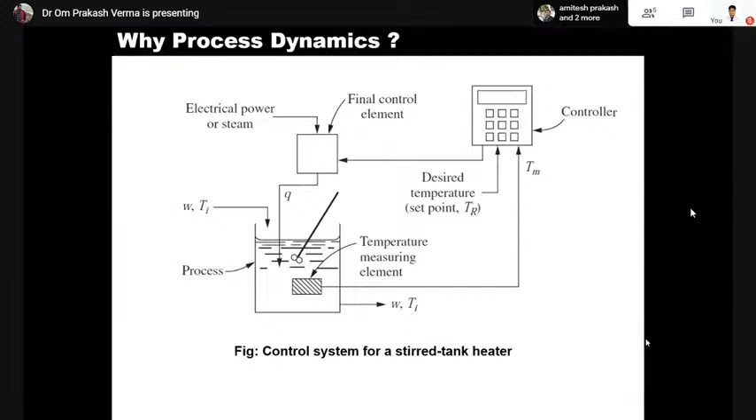Okay. So yesterday, what we have discussed. First, about different types of mathematical model development of some process, such as liquid level system, temperature control system. So we have developed the model with the help of first principles of thermodynamics using the mass conservation, the heat transfer, energy balance, and the component balance. Based on that, we have understood the difference between the open loop system and the feedback system. And then we have discussed the feed forward control system and feedback system.

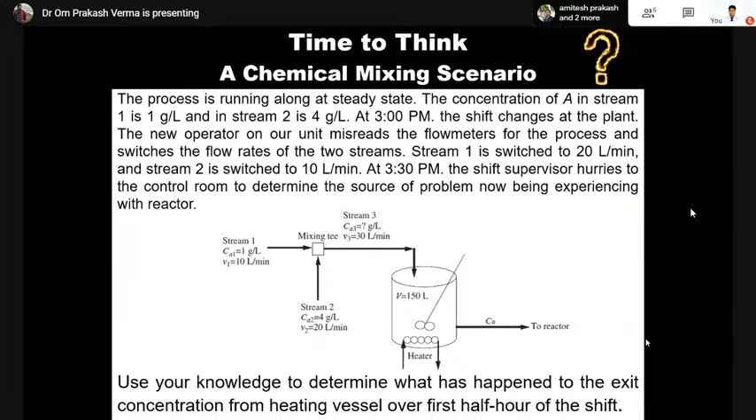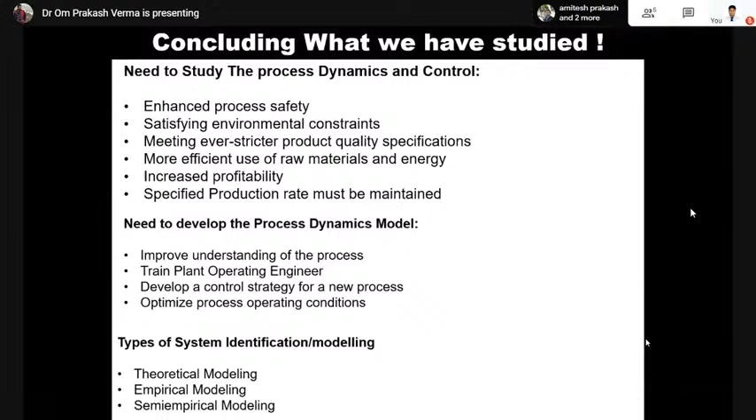Then we have discussed some questions why the process industries are important. And in order to that, we have discussed the problems regarding the operation control for the process industries, in which we have discussed heat transfer and mass transfer like problems, and then we have seen the transients, and we have discussed the different types of process model. Then we have discussed the model part, and the different types of the modeling equation.

Which type of equations usually occur or are usually developed in the mathematics for the system model. The system model consists of generally algebraic model, ODE, PDE, and maybe the combination of ODE, maybe the combination of PDE, and maybe the combination of all three. Then we have discussed the model in terms of linearity and non-linearity. Then we have discussed static and dynamic systems.

In the dynamic system, we have discussed the accumulation term. We have discussed the d by dt term; in the steady state it becomes zero. Then we have discussed the lumped parameter, distributed parameter, and we have solved one example using the distributed parameters of the solid, the heat conduction in the solid. And then we have discussed the different types of model using the white box, gray box, and black box. We have seen the regulator and servo problem also.

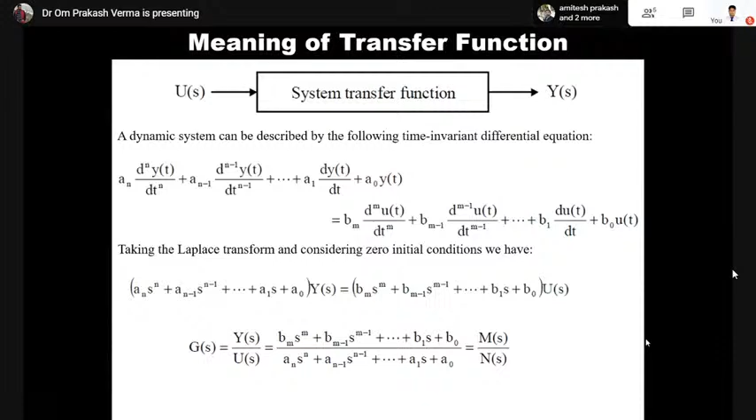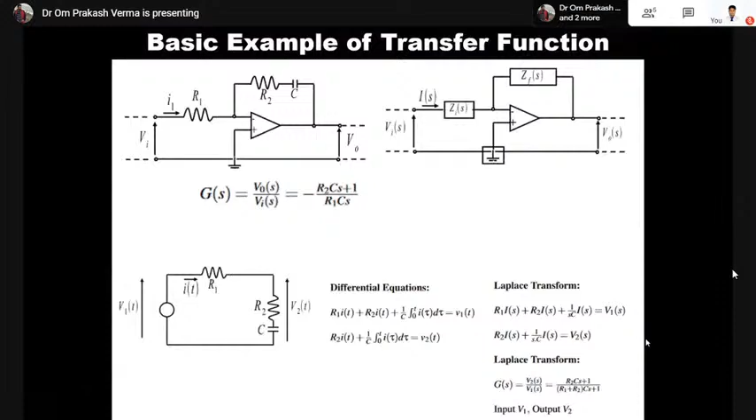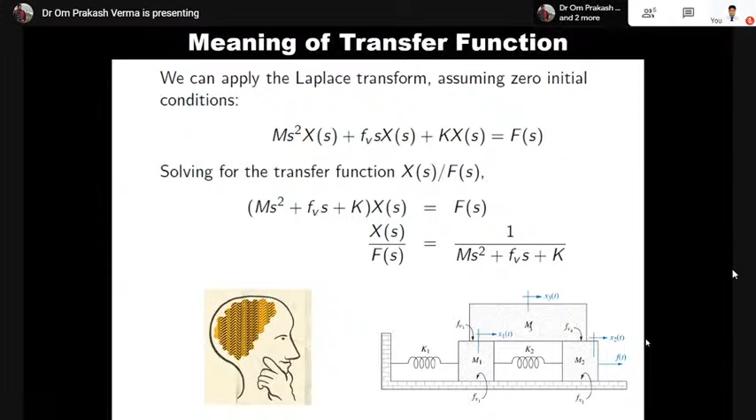Then we have discussed yesterday the transfer function, the concept of transfer function. What is the real meaning of transfer function? And then we have developed some equations of an electrical system, then the mechanical system, and then I have given one assignment, but due to the unavailability of the PPT, it has not been solved. But try to solve it today. I will give this PPT to all of you, so try to solve this puzzle.

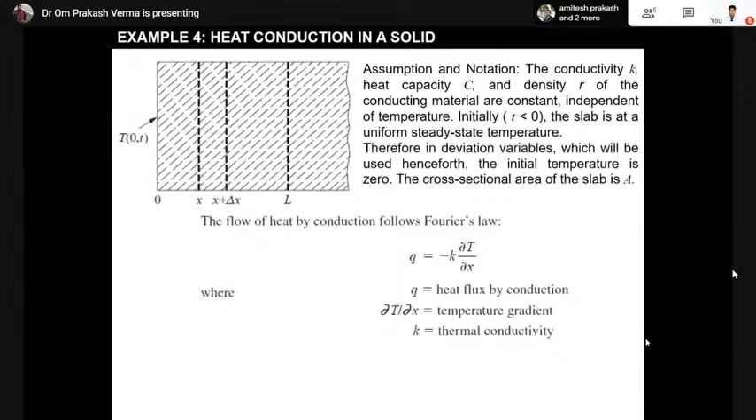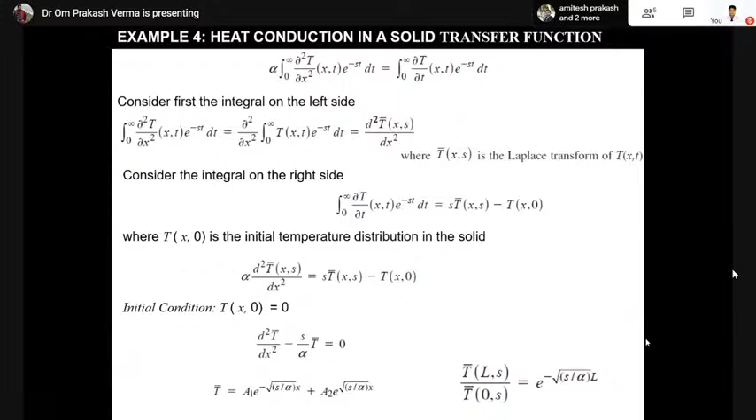Then we have discussed the first order transfer function of the liquid level tank, then linearization techniques. We will discuss these things more after some time. Then we have discussed the distributed parameter model, that is the heat conduction of solid, and then we have concluded with the state space equation, how the state space equation has been written for your mass spring system. So I am starting again with this PPT.

So in the state space equation, what we have learned in the spring mass damper system, which is basically a mechanical system. In the mechanical system, when we write the equation, the force acting on the mass is ma, that is m into d2x by dt square, and the force acting on the spring is kx, and the damper force is bv, damping coefficient into the velocity, and that velocity is written in the form of dx by dt.

Generally, in the book, B is written. We have used the symbol f subscript v. There is no problem, both are the same. And k is Hooke's constant, that is the spring constant, k into x.

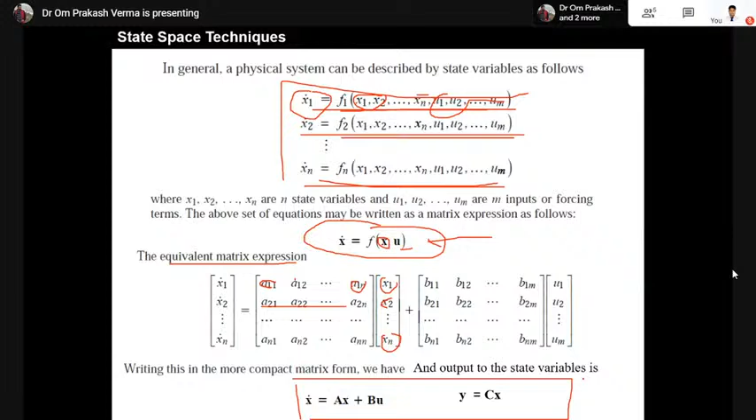So finally, the compact equation we can write like this: x dot equals Ax plus Bu, y equals Cx. Now I will give one example of the process industry problems so that you can understand how the state space equation is developed. This is one very classical example used in the process industries: the interconnection of two tanks, but there is a beauty in this connection. See the first connection and the other connection.

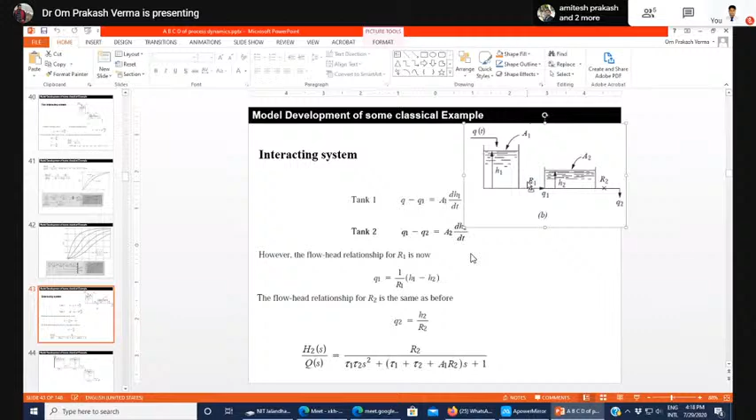So do you find any difference between the two tank systems? Wait for a minute, so that you can understand it easily. Okay, so now see, is there any difference between this one and this one? Obviously, yes. The interconnection of these two tanks and these two tanks is entirely different, and therefore the characteristics and the response of the system become entirely different.

This connection is known as the non-interacting type connection, whereas this type of connection is known as an interacting system. Why is it called non-interacting? Because the product of the first tank, when entering the second tank, is not connected directly, but goes through the air. However, this one goes through the pipe, and they are interconnected to each other.

So the resistance R1 and the relation of R1 with this one are entirely different. It will take a different equation, and therefore there is a difference in response. So we are trying to develop the model of this non-interacting system first. You have already seen the development of the first order single tank problem.

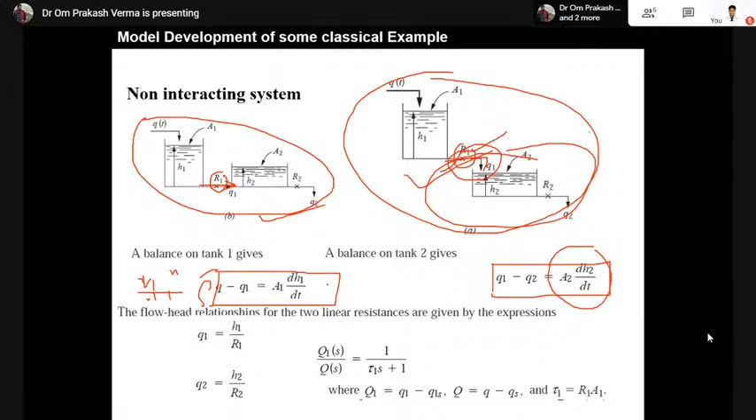So this one and this one are totally independent equations. And as we know, if the valve R1 shows a linear characteristic, then the equation is written as q1 equals h1 by R1. Similarly, you can write q2 equals h2 by R2, and this equation is only valid for a linear system, okay. So just put this value of q1 here and q2 here, and solve the two equations.

After solving the equations, you already know what happened for the first system. What is q1(s)? q1(s) is the output flow rate, and the input is q. So the transfer function, I am repeating once again, is the relationship between output upon input in Laplace transform, putting all the initial conditions zero. We have already discussed why the initial condition is zero and why we have taken the Laplace transform, due to the need of the system.

We can take the Z transform. We basically have to establish the relationship between output upon input, so therefore we have taken it. So now, q1(s) upon q(s) becomes 1 upon tau1 s plus 1. There's no problem, and we have already solved h1(s) upon q(s) equals R1 upon tau1 s plus 1, in the previous slide.

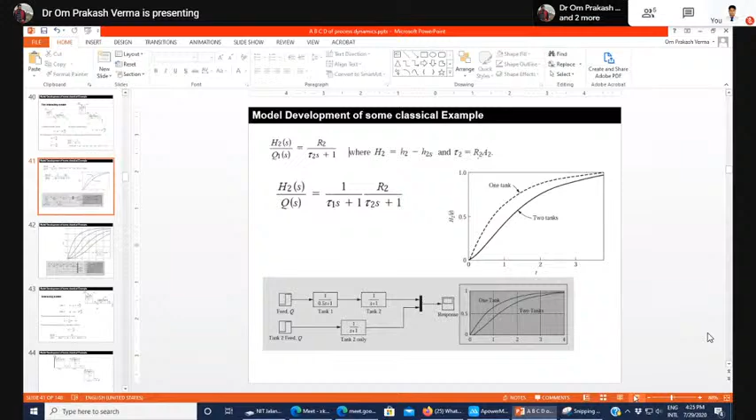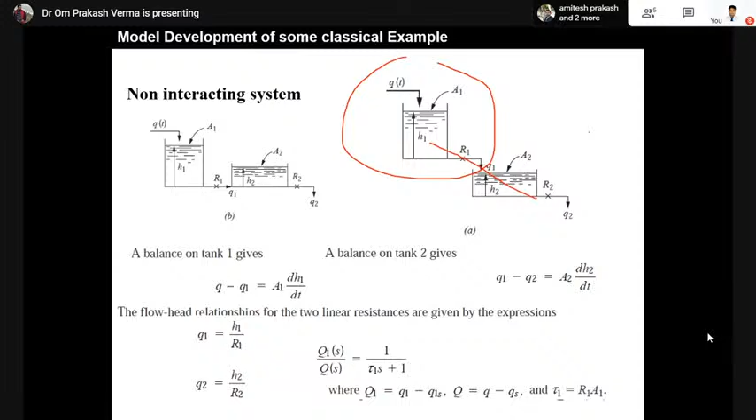Now it's time for some simulation. Now I want to discuss the response of the two tank system. This is basically a single tank system, and when it comprises two tanks, it becomes a double tank system. When we compare the response of the one tank and two tank systems, obviously the single tank system is faster than the two tank system.

So how can we find the response? In MATLAB, you can write your code, or otherwise you can make a Simulink model. With the help of a Simulink model, you can find the response of the system. Suppose this is q. This is the step response. We will discuss what the meaning of step is. So just, we are applying a staircase input.

Okay, the staircase input with, let's say, unit magnitude one. And this is in MATLAB, just to put the values of the transfer function. Let's say tau one, the first time constant of the tank, is 0.5, and the second is, let's say, 1. When you simulate the system, obviously this is the open loop system. We have not used any controller.

Similarly, this is the single tank system, the first tank. This is when we take the single tank system and compare the response of the system here on the screen. So the output will come here. You can see this is the one tank system response, and this is obviously the two tank system response.

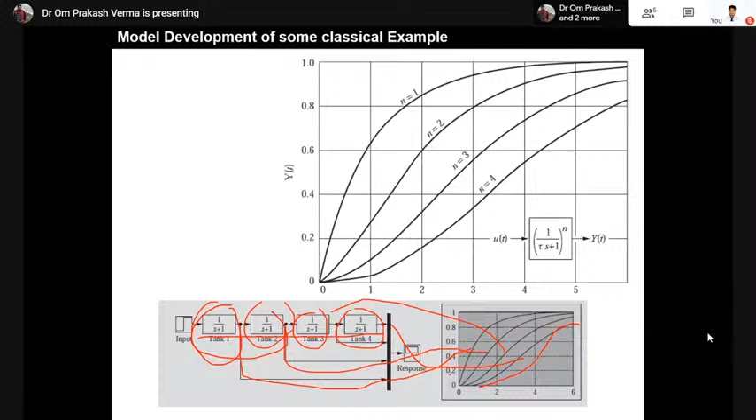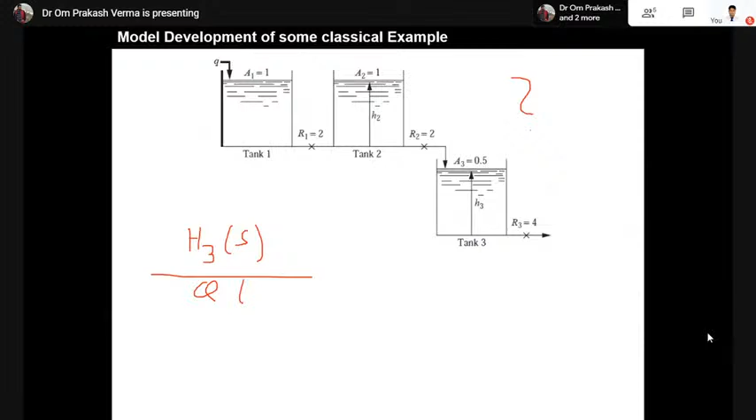So you have to solve this question, you have to develop this model and try to find out the transfer function, H3(s) upon Q(s). Try to solve this transfer function. So this is one of your assignment problems. Try to solve. If you practice such types of problems, then you can solve any type of model usually used in the process industries.

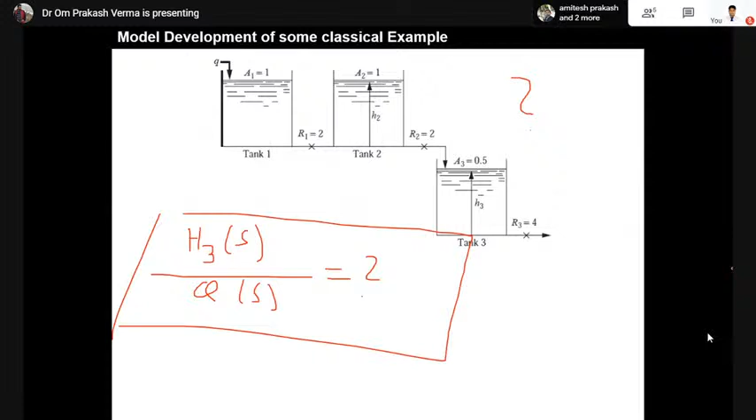Right. So now see, I want to develop the same model using the state space technique. So what is the benefit of the state space technique when we convert the same model into state space? Here we have written the model in the Laplace transform. We have established the transfer function in the form of Laplace transform, and the same equation may be written in the form of state space. So what is the need for the state space equation?

We have already discussed that the state space equation is applicable for the non-linear system also. However, the transfer function is not available for the non-linear system. Also, the transfer function is simply not applicable to the MIMO system, that is multi-input and multi-output; it is only restricted to single input, single output. However, state space is applicable for the multi-input and multi-output variable system.

One of the greatest advantages of using the state space technique is we have written the equation in the form of matrices, and MATLAB or whatever computer simulation generally uses matrix multiplication, matrix addition, some type of matrix application. It is easy for the simulation. It is easy for computation using the computer. So therefore, we are representing our problems, our models, in the state space equation.

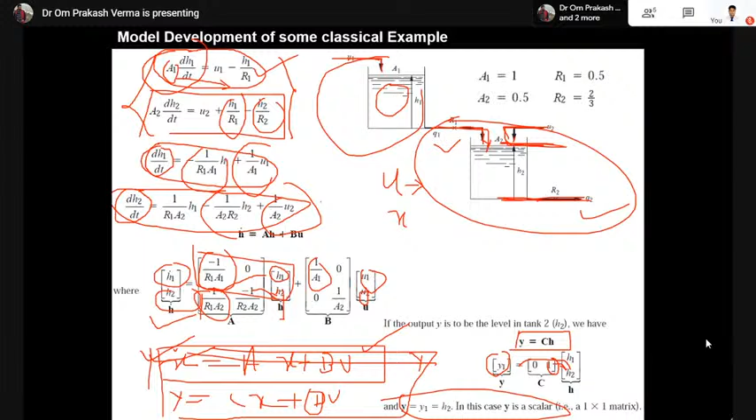ABCD of process dynamics. So basically what you have studied in class will be the basic of control system in third year. But once you have the knowledge of the basics of control system and enter into higher study of control system, you encounter only the state space equation. So from the state space equation, the real control system starts. So there's no problem.

So now we are entering into the world of transient analysis, basically time domain analysis. In time domain analysis, the response of a dynamic system to an input is expressed as a function of time. Basically, we want to find out the transient of the system.

After applying some input, such as here, you can see this system. Let's say this is the transfer function, this is the flow rate, and this one is basically the change in the level of the second tank system. So when we change the input in tank one, the level of tank two will change accordingly.

So for h2 to get some saturation, it will take some time. So during that time, how much it will take for saturation, for settling, we have to analyze. So for the analysis of that, we have to supply some input and check what happens with the output.

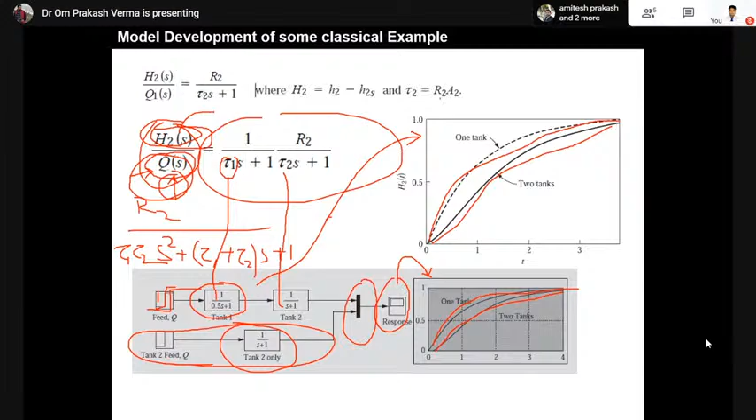So for that purpose we want to study the time domain analysis. It is possible to compute the time response of the system if we know the nature of the input - meaning what we are supplying as input - and second, the mathematical model of the system.

So I think we are now enough to understand how the mathematical model of the system is developed.

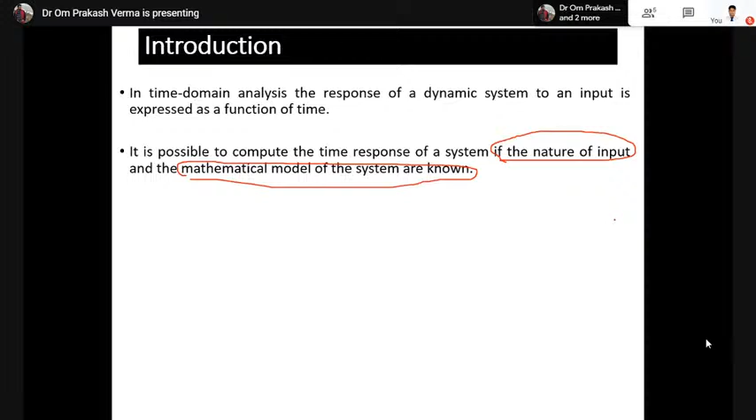How the mathematical model of systems are developed, we have already discussed. Usually the input signal to a control system is not known fully ahead of time. The problem is, in a real time system, the inputs we are going to apply are not known. The nature of the input we are going to supply is not known, how it is going to change, we don't know. So we just apply some classical testing signal so that we can test the output response to the input.

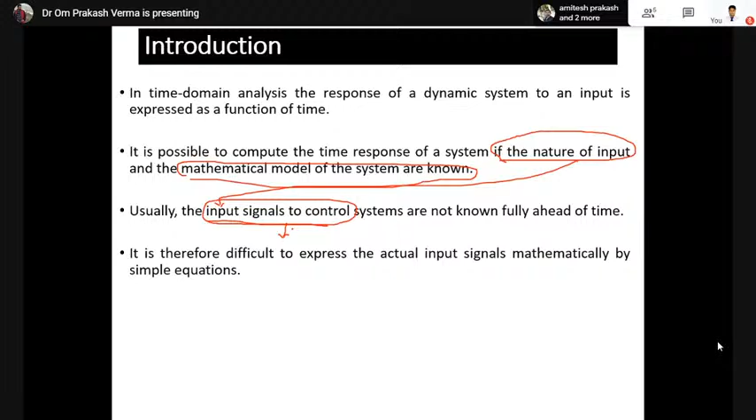It is very difficult to express the actual input signal mathematically by simple equations. However, we have developed some relationship for that input, based on the characteristic of how actual input signals suddenly change. We analyze the different nature of the input and try to mimic or develop such input in mathematical terms. Once we have the developed mathematical model and find the input, we apply it into the transfer function or model and visualize the open loop response, as we already saw with the coupled tank system, interacting or non-interacting types.

The general nature of the input is like a sudden shock. Sudden shock means, let's say at t equal to 0, in a very short time, the magnitude or value of the input is very, very high. At t equal to 0, it is like a shock.

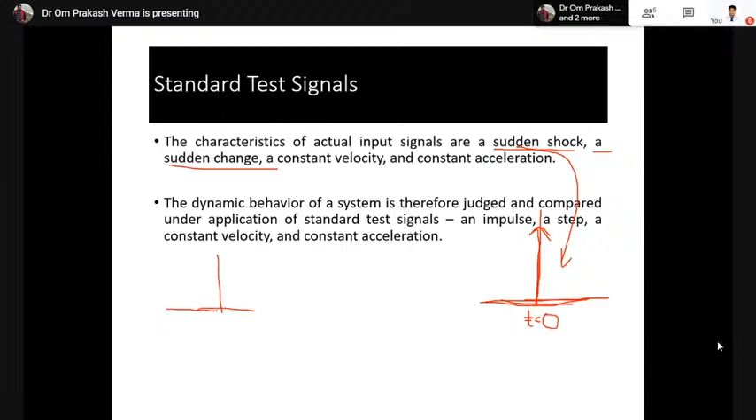Second, a sudden change can be represented like this: the input before t equal to 0 was, let's say, 0, and at t equal to 0 it suddenly changed to 1. This type of input is used in testing control systems. Second, the constant velocity, that is ramp type input, is used - this is the ramp system. Then the constant acceleration, that is parabolic type input, is used. So the important inputs are sudden shock and sudden change. However, these others are important but less so - our focus is mainly on sudden shock and sudden change.

The dynamic behavior of a system is judged and compared under the application of these test input signals. This input signal is known as impulse - this is the impulse signal, this is the step signal, this is the ramp signal, and this is the parabolic signal. Impulse means a very high value in a very small time, and this is the step input.

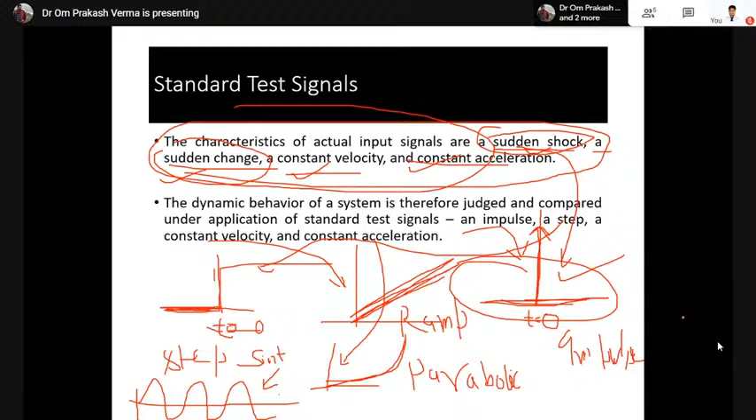Now the other standard signal of great importance is sinusoidal. Sinusoidal signal is also one of the inputs we apply, but I have not included it in this PPT - it is sin(t). I will try to give one example using the sinusoidal input so you can visualize the problems easily, and why we use such sinusoidal input.

Now let's come to the mathematics of this test. These are very basic signals you have already studied in signal systems, but if you don't know this, it is my duty to introduce them. This one is the impulse signal - at t equal to 0, the value is very high. Mathematically, if you studied signal systems, this is represented by minus a by 2, this is a by 2 - the concept is like this, and the magnitude is...

Okay, so this is minus a by 2. And this one is a by 2. And then 1 by the magnitude of this one is a, 1 by a. Now what is the concept here? The concept is, listen very carefully, it is very important for your engineering problems, because you are electrical engineers, so you should know this one. What is this? Okay, so as you decrease this...

What we have to do, basically, the area of this region, the area of this pulse signal is fixed. That is the one. So we have to fix this one and change the width. So ultimately, if we want to keep the area one, and let's say this is approaching this side and this approaching this side, then we have to increase this value. Agree? So we have to increase this value in order to make the area one, as we have reduced this width.

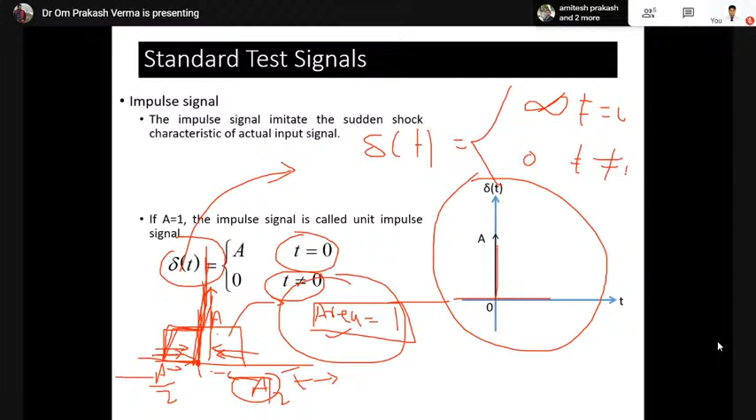Okay, so this one is basically the concept of the impulse signal. So delta t is basically defined at t equal to 0, and at t not equal to 0, the value is 0. However, this is also defined like this one: delta t is nothing but the value is infinite at t equal to 0. However, the value is 0 at t not equal to 0, right? So this is also one definition. This is the unit impulse, and if it is not defined, then it is impulse signal, right?

Okay, now the step signal. The step signal is what I have changed. This is the change in the input, as before zero the value was zero, and suddenly at t equal to zero, the output is changed to one. But such type of this is only mathematics, it can never be the ideal. This system can never be realized, because it is a non-causal system.

And the amplitude, when you read the signal system, you will get the phenomena, Gibbs phenomena, and using the Gibbs phenomena, if I ask a question - a very popular question - what is the value before zero, before t equal 0? The value is 0, no problem. Before t less than 0, the value is 0, no problem. And greater than 0, the value is also a, no problem. But what is the value at t equal to 0? Mathematically it is written as a, but exactly it is either 0 or a, you can't say anything. Okay, because this is discontinuous at t equal to 0. Okay, and since the function is discontinuous, you can't be able to find the value.

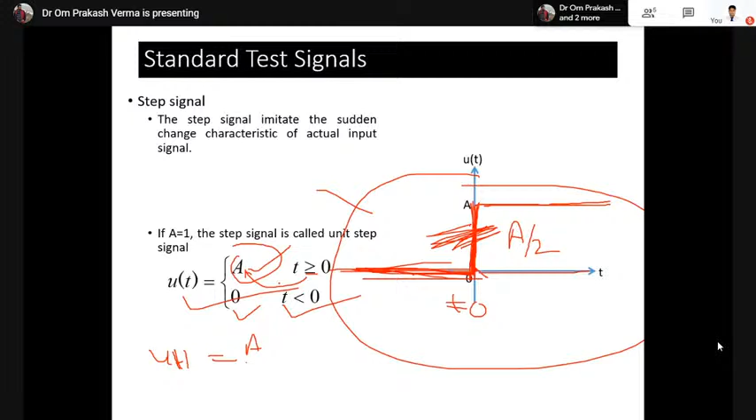So according to the Gibbs phenomena, we are taking the average value. So the actual value at t equal to 0 is a by 2, the average of this one and this one. Average value we are taking, but for the mathematical convenience, we have taken this value as a. So u(t) is equals to, a and 0. So this is the definition of the step input, right?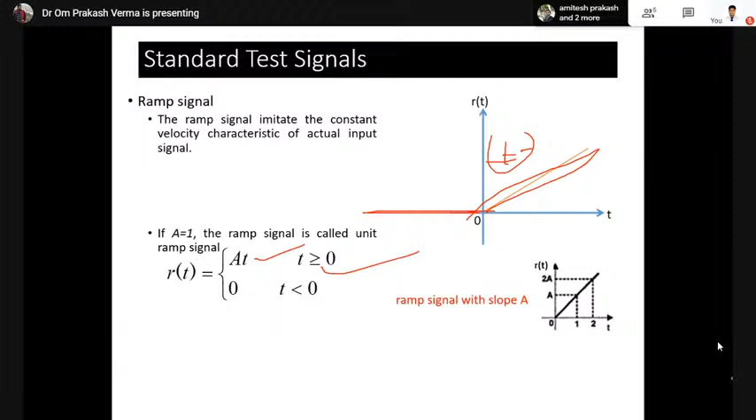So ramp signal. Okay, what is the ramp signal? Ramp signal is nothing but t with slope one. Slope is anything, 45-degree, whatever, and the equation is t, for t greater than 0, and the value is 0 for less than 0. Okay, so this is a ramp signal.

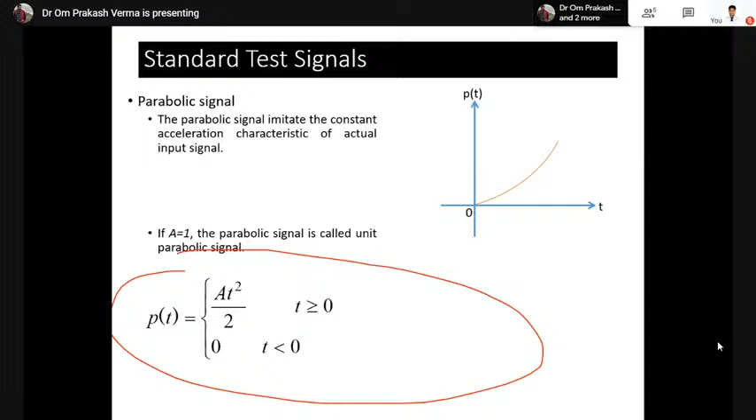Now come to the parabolic signal. The parabolic signal is nothing but At square by 2 for t greater than 0, and for less than 0, the value is 0.

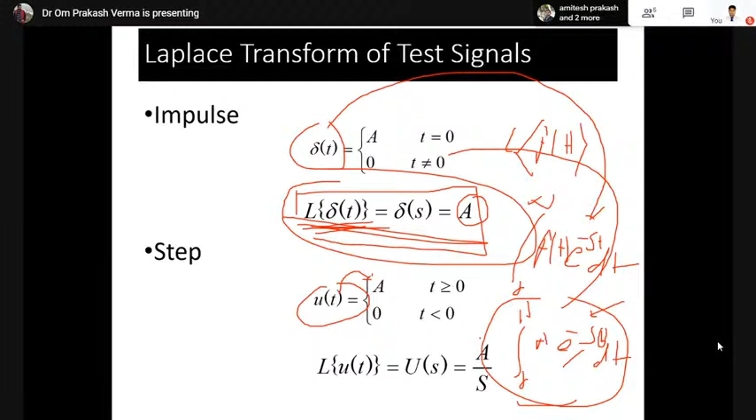So the Laplace transform of the impulse signal is nothing but the same value A. However, if you take the Laplace transform of u(t), that is A, then it comes to A by s. And what about the ramp signal? You can find out the ramp signal. There is no problem finding this, and the same for the parabolic function.

Okay, so now come to the response of the system. This is very important. So now, time response of a dynamic system. What is the meaning of dynamic system? A dynamic system is nothing but one that comprises differential equations, generally first order differential equations. In all the control systems we have seen already, the system is either a first order system or a second order system. Based on that, the response comes.

When you're supplying some input with variation of time, then you get some output with variation of time also. Now there are basically two types of analysis of the control system. First is the time domain analysis. Okay, time response, as we have written.

Second, the frequency response. When we apply some frequency input, then we get the response to that, the frequency response. Okay, we have not included the frequency response in the present course. However, for the analysis of tuning in the PID control, we will use the Ziegler-Nichols method.

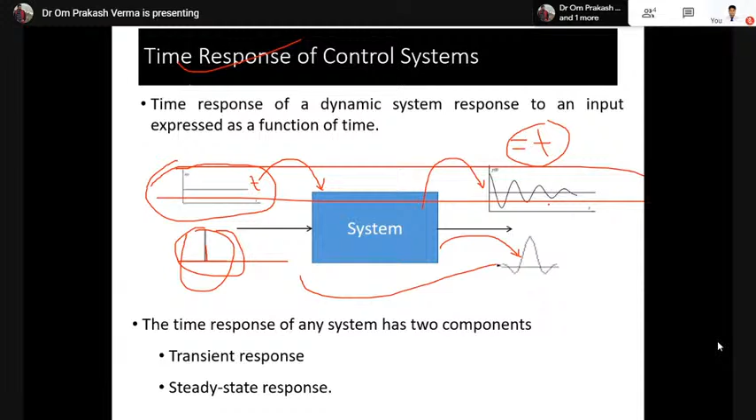Now the time response of the system has two components. Basically, first is the transient response. Second is the steady state response. We have already seen from the tank system and from the operating process problems, first the steady state problems and the transient problems also.

So when the input is applied to the system, at the same time the output will not change. It will take some time. And after that, it will take some time to settle the output or come to the steady state. So that time is basically your transient period.

That time is your transient period, and as control engineers, you don't want any transients. So the target is to reach the set point or the desired value as soon as possible, without wasting time. Our ultimate target is to remove this one.

So when the response of the system is changed from equilibrium, it will take some time to settle down, and this is called transient. As you know, this is the applied input and it will take some time to go there, and once it is achieved, it is settled. There's no problem. But we have to achieve this value as soon as possible. So this is our target.

The response of the system after the transient is called the steady state response. So this is the steady state response, and this is the transient response. This side is the steady state response. The transient response depends on the system poles only.

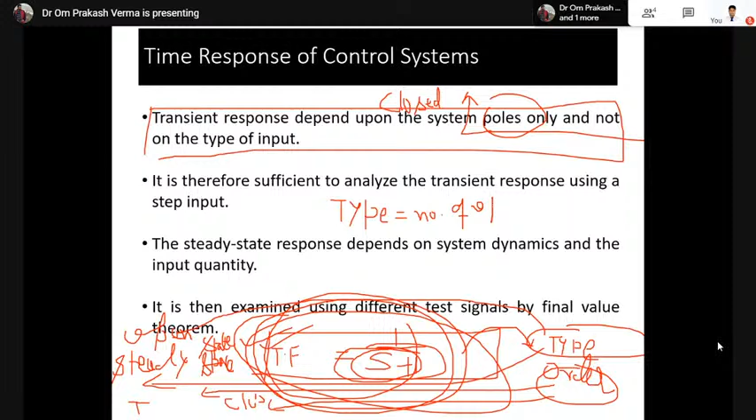It is defined as the number of open loop poles lying at the origin. So this is basically the definition of the type of the system. The type of the system is only defined for the open loop system, and it is the number of open loop poles

lying at the origin. So here we can see s to the power 0, and s plus 1 is written here. So s power 0 is there, so this is a type 0 system. This is type 0 and order 1. What is the order? Order is the maximum power of the polynomial, the maximum degree of this polynomial. The maximum power of s is 1, so your order is 1.

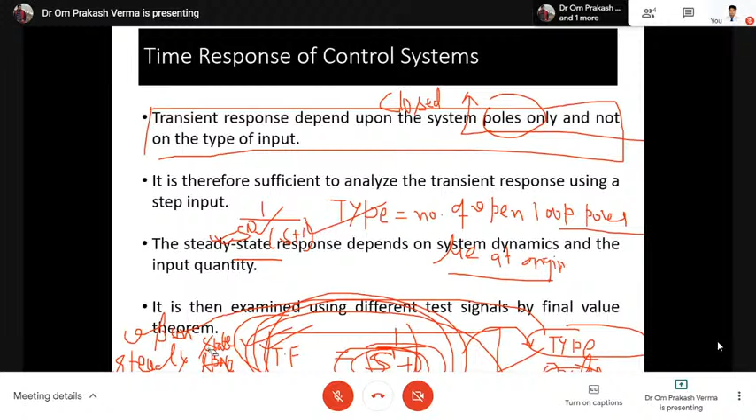So number of poles. Order of the system is the number of poles of the closed loop system. And I'm repeating once again, the type of the system is the number of open loop poles that lie at the origin. Is it okay? So for this particular problem, 1/(s+1), this is the problem.

It means the number of open loop poles is 0, but it is written here transfer function. Transfer function doesn't say whether it is open loop or closed loop, but generally the transfer function is used for the closed loop system. The transfer function for the closed loop system is defined as G(s) upon 1 plus G(s)H(s), the standard equation we have seen yesterday.

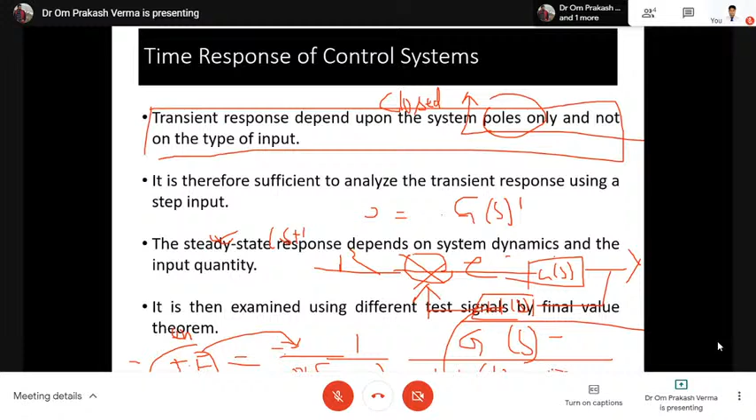So G(s) is your forward path gain, whereas this one is the feedback we have already discussed. This is the comparator, with the help of which error is generated, and this is the input and this is the output. So this is the transfer function G(s) upon 1 plus G(s)H(s). And what is the open loop transfer function? It is nothing but G(s) or G(s)H(s). If it is unity feedback, H is 1, so this is the transfer function for the open loop system.

So now G(s) upon 1 plus G(s) equals 1 upon s plus 1 is given. Basically, this is the closed loop system. When nothing is written in the problem, we generally consider the problem to be of the closed loop system. So the closed loop transfer function is given here as 1 upon s plus 1.

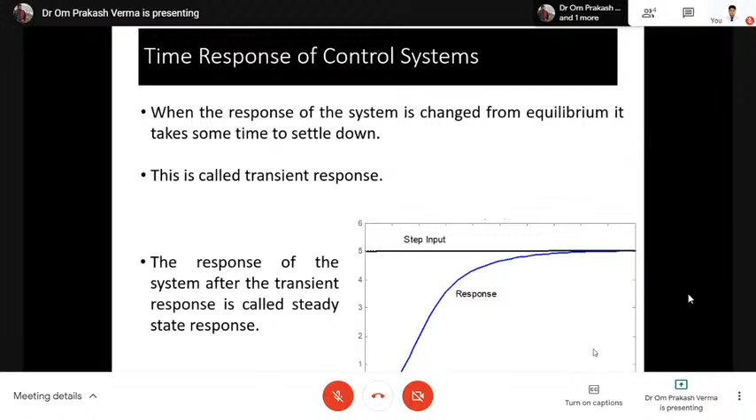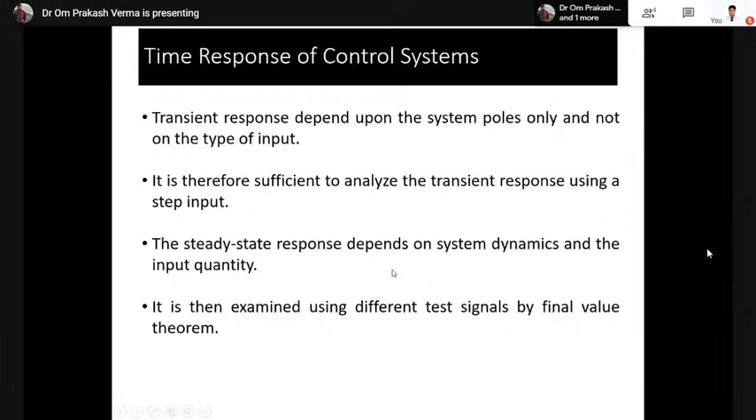So the transient response depends upon the system poles only and not on the type of input. Okay. It is therefore sufficient to analyze the transient response using step input. The steady state response depends on the system dynamics and the input quantity, which I will discuss. It is then examined.

Now see, this is a first order system, and there is one pole. What is the location of the pole? S is equal to minus 1 upon T. Okay, so the gain of the system is K. However, the time constant of the system is capital T. Okay, so this is the first order system.

Now we will start with the input. We are taking the step response. Generally, we are taking two types of input: delta t, that's the impulse response, and u(t), that is the step response, as we have discussed a few minutes back.

Okay, so what is the DC gain of the system? The DC gain question has been asked in the GATE exam in 2007, 8, 9, 10. I don't know the exact year, but the question has been asked. The transfer function was given, and they asked the DC gain of the system. So the DC gain of the system is the ratio between the steady state value and the input signal.

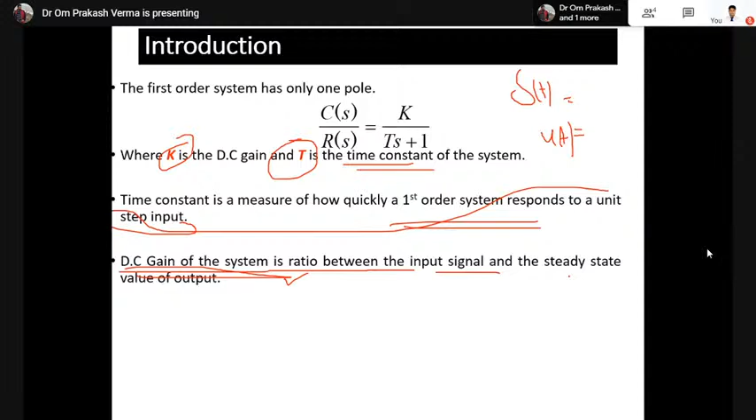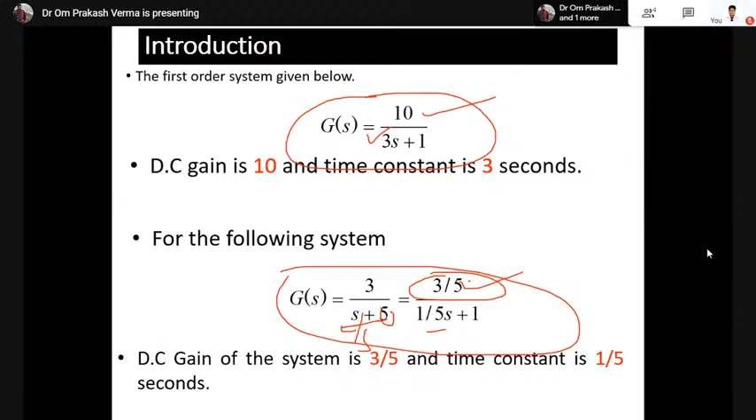Okay, steady state value. So let's say this is the problem, 10 upon 3s plus 1. So now the tau is 3 seconds, and the DC gain is 10. For the following system, what is the DC gain and time constant? So s plus 5 is given. You can take the 5 common, and it becomes 3 by 5. So the DC gain is this one, and the time constant is this one. These are problems.

Okay, now see the impulse response of the first order system. So what is the impulse response of the first order system? Let's say we have taken the impulse input delta t, and the Laplace transform of delta t is one. As we have discussed, delta t is equal to A at t equal to 0, and the Laplace transform of this one is again A. So if the input is 1, the Laplace transform is also 1, right? So this is the unit impulse signal we have discussed earlier.

So once we supply the unit impulse input 1, we have to find C(s). You have to remember one thing. Multiplication in the time domain is equal to convolution in the frequency domain, and vice versa: convolution in the time domain is equal to multiplication in the frequency domain. So here the response is the multiplication of the two signals, but in the time domain the output is the convolution of two signals. In the Laplace transform, which is basically frequency domain, it is multiplied.

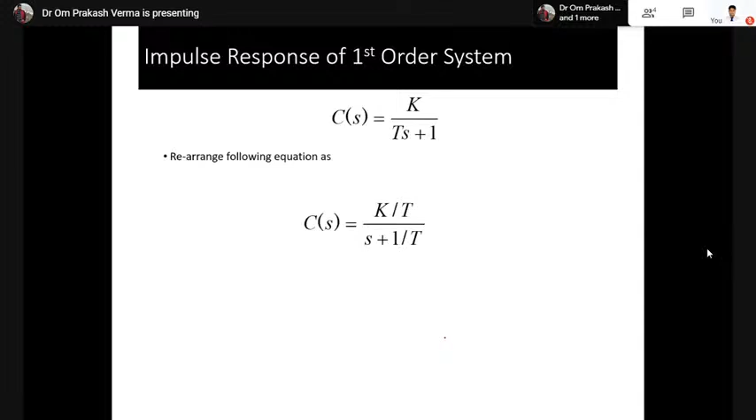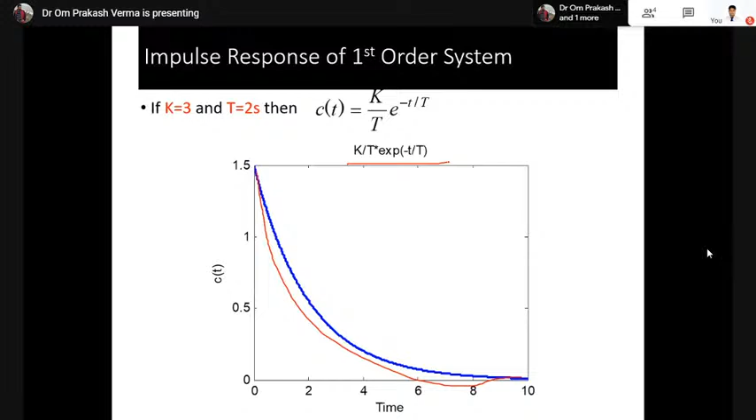So now see how it is calculated. C(s) is equal to K upon Ts plus 1 when the input is 1. Now calculate the inverse Laplace of this equation. When you rearrange this equation and take the inverse Laplace, we get c(t) equals K upon T e to the power minus t by T. And when you plot this equation, you find it like this one. So this is K by T, e to the minus t by T.

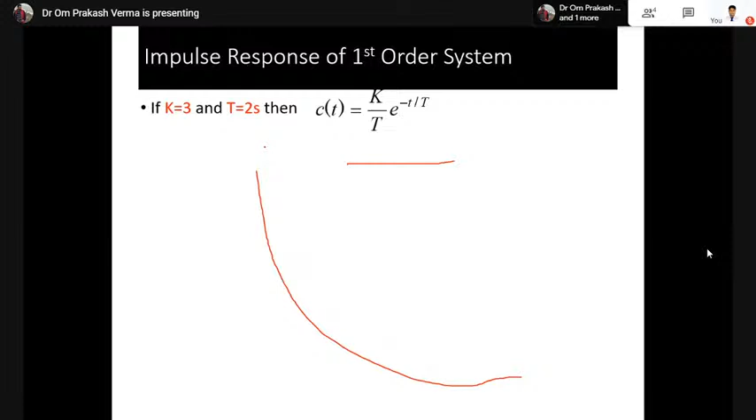Now, take the step input instead of the impulse input. We already said a variation in input is like a certain shock or certain change. So we have tested a certain shock here just by the impulse input. However, here we have tried the response with the help of the step input. So the step is applied, which is 1 upon s.

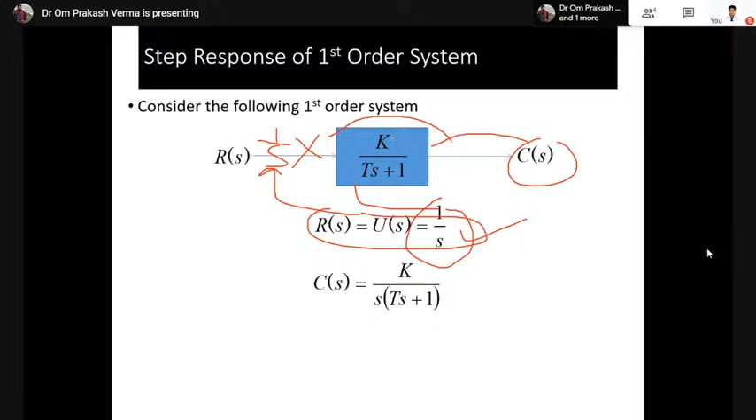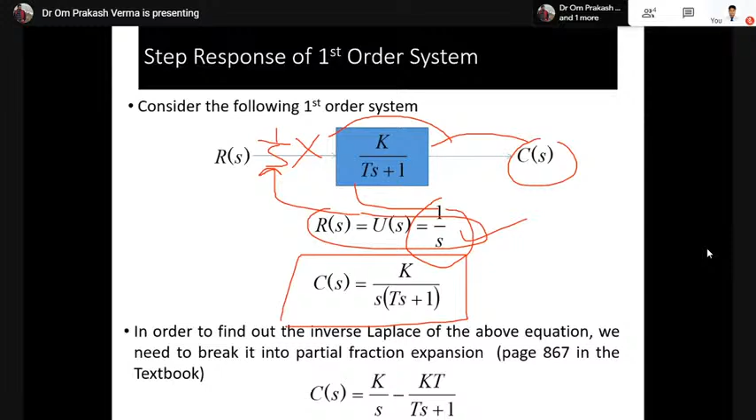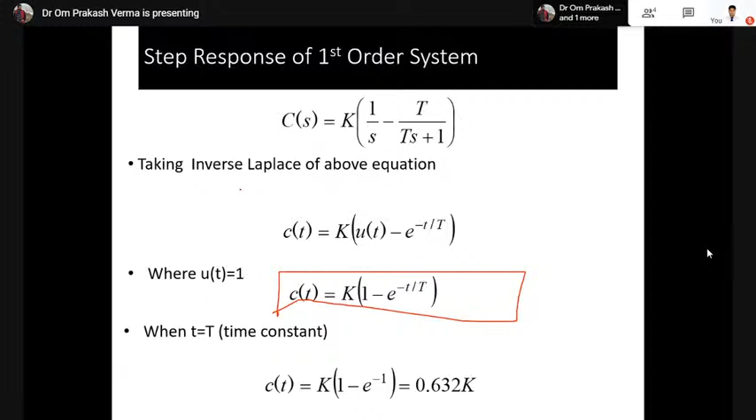The value of step input we have taken, let's say u(t) is 1 here. If you take the input u(t) equals 10, sorry, y(t), the total DC gain is, let's say, 10. Okay, this is 10. Okay, y equals this k. So 63% of the final value is this one, and mapping this value corresponding to that time, this time is basically known as the time constant.

So what is the time constant? The time constant basically decides the speed of the response of the system, and how the speed will be decided with the help of the time constant. If the time constant is fast, if the time constant is slow, we will see the effect of that time constant on the system. So with 1/(τs + 1), you can check how it will affect the system.

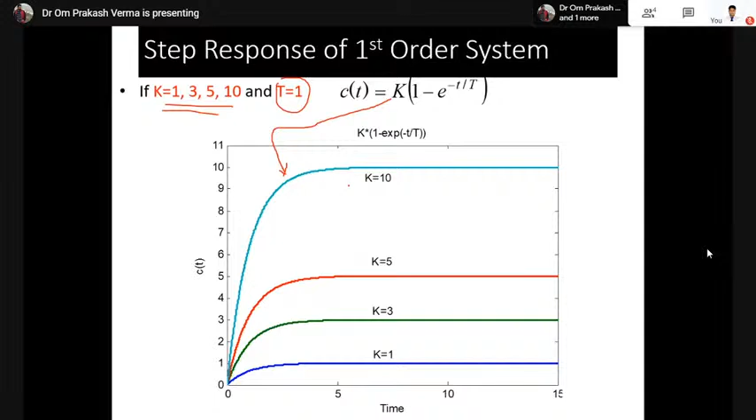Now see, here we had the variation of T. Now we keep T constant; we have considered T equals 1 and vary the gain. When the gain k equals 1, k equals 10, k equals 5, k equals 3, the set point will change, uplifting or downlifting the amplitude of the system.

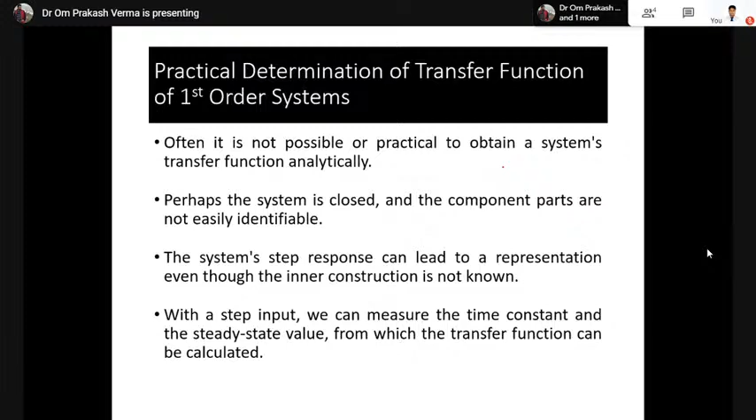Now the practical determination of the transfer function of the first order system. In general, when you encounter the problem of Ziegler-Nichols or the Cohen-Coon method for the tuning of the PID controller, which we will see tomorrow, in such types of problems, basically the response in industry, I'm giving an example.

I'll try to illustrate with a simple example. Suppose you have to control some parameters, temperature or level or the flow of any process. So ultimately, first you visualize the open loop response of that system, and then only you are able to apply some control. Let's say you have applied some PID control with some settings, and after that you got some response, but you find that the response occurred after tuning is not very satisfactory.

So again your target is to manipulate that tuning settings or the parameter settings of the controller, so that you will achieve a very satisfactory response. Until you get the satisfactory response, you will try to change those parameter settings. So for that purpose you have to visualize the first order response of the system. The response of the system was given for your problem. Now, by visualizing or analyzing that response, you have to change the parameter settings. So first of all, you have to calculate the mathematical model using that visualization.

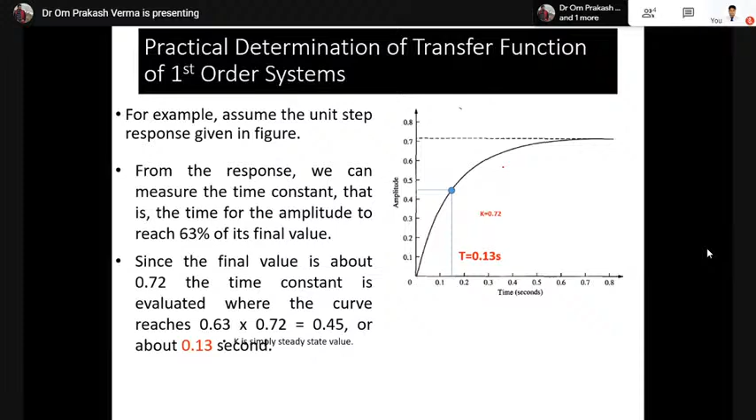I have taken this example from the Seborg book, Process Dynamics and Control. This is the problem: Figure 7.4 shows the response of the temperature T in the continuous stirred-tank reactor to a step change in the feed flow rate W from 120 to 125 kg per minute.

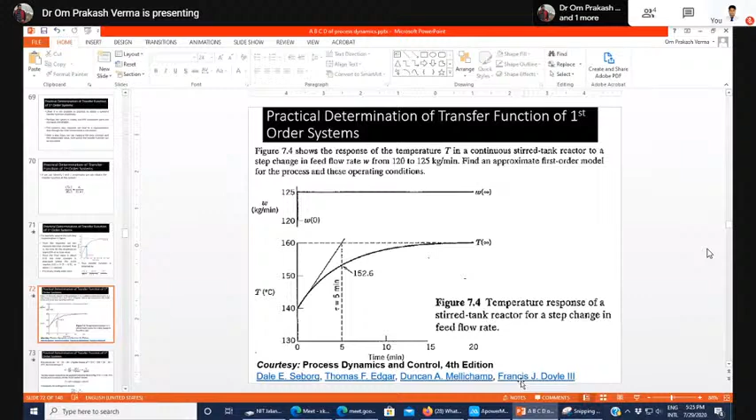Amitesh, we have time now, we can continue for 5 minutes or 10 minutes. Amitesh, can you hear me? Hello, hello, Amitesh, Mitesh? Mr. Anis, are you hearing me? Mr. Anis, Mr. Anis?

Yes, sir, I'm here. Okay, okay, so we have time, 5 minutes or 10 minutes, we can continue. Yes, sir, sure, sir. Okay, so I will take 5 to 10 minutes, then we will start tomorrow. Okay, I will take only 5 to 10 minutes to cover this. Okay.

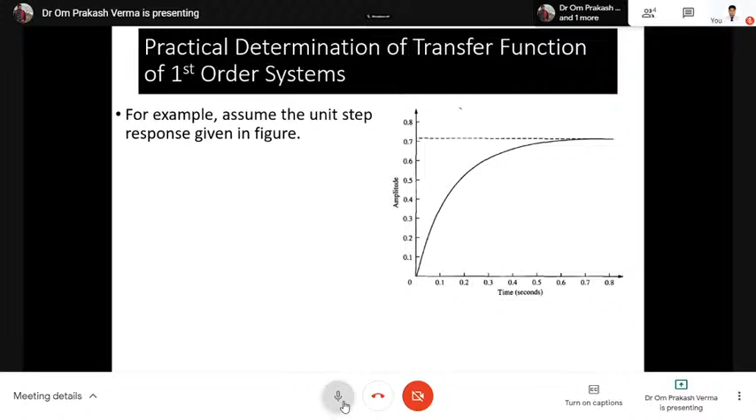Okay, so is my presentation visible to all of you? Okay, so now I want to discuss one problem so that you can understand how the mathematical model can be developed with the help of the response of the system.

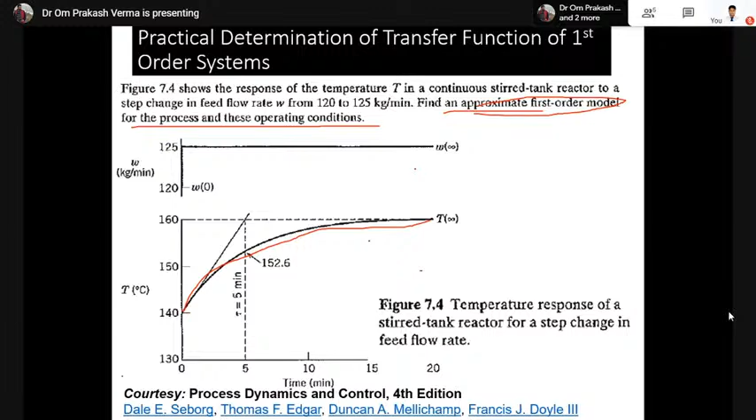Now our target is to design or develop the approximate first order model for the process and find out the condition. This problem is taken from Seborg. So the solution is like this: what is the change in input? The change in input is from 120 to 125, that is a change of 5 units of the flow rate. However, the output changed from 140 to 160. So the steady state gain is defined as the change in output upon the change in input.

So change in output is 20 degrees and the temperature is changing from 160 to 140, and the input flow rate is changed from 125 to 120. So this is 4 degrees Celsius per kg per minute. So this is K. Any transfer function, the first order transfer function, is defined as K upon tau s plus 1.

So you have evaluated the value of K. Now your target is to find the value of tau. And you know what is tau? Tau is basically 63.2%. So from the figure you can see the tau is given already. This tau is already given, just this is the 63.2%. So the 63.2% value is this one, at this value of tau.

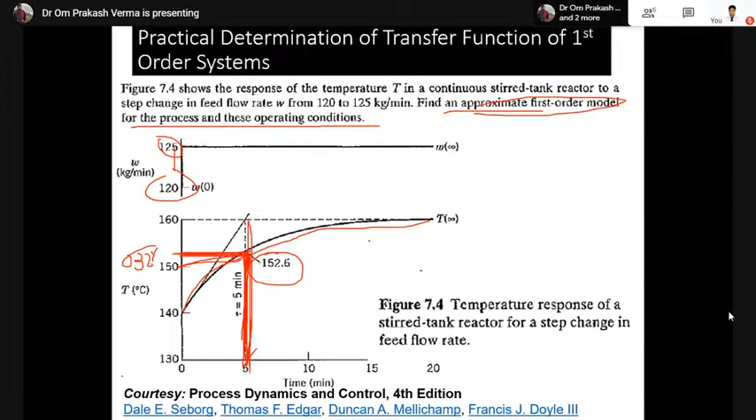Or otherwise, if it is not given, you can find out the value using some statistical tools. At what time does this value of 63.2% correspond, and you can evaluate this value. Here it is given already, so no problem in that. So 5 minutes is given, and K is also given.

So you can find out the transfer function, 4 upon 5s plus 1. However, the final value, final value means, what is the value of t infinite, what is the value of t infinite? So you can find out the T infinite like this.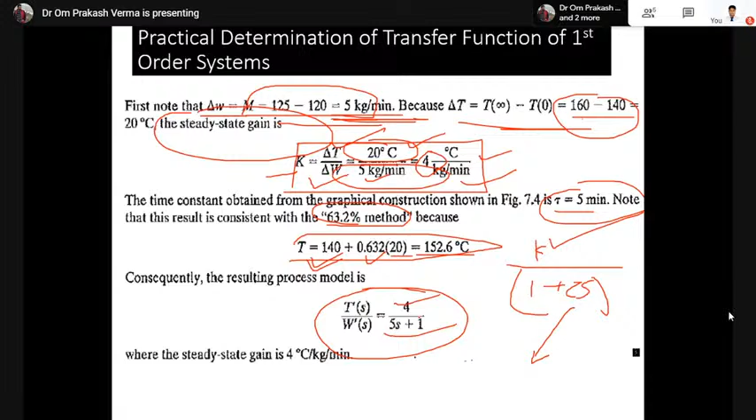The 140 temperature is the starting one, it started from 140, and then it is 63.2% into 20. 20 means the total change, so it will be multiplied and added with this, that is 152.6. So at 63.2%, this value has come. I think there is no problem in that. You can compute like this also, you can find out the transfer function like this also. So this is the problem.

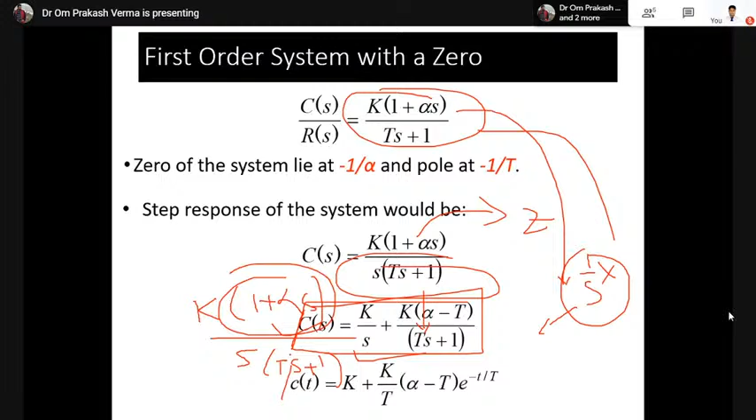Now let's say this type of first order model is encountered, and you have supplied some 1 upon s type of input, that is the step input, and want to compute the response of the system. Then you can multiply the 1 upon s into this value and compute the Laplace inverse, and such type of response you will get.

Now there is one such type of delay system. What is the meaning of delay system? First let me tell you. I will show you after this slide. But generally, you always remember that e to the power minus s td, or e to the power minus ts, this is the transfer function for any delay system.

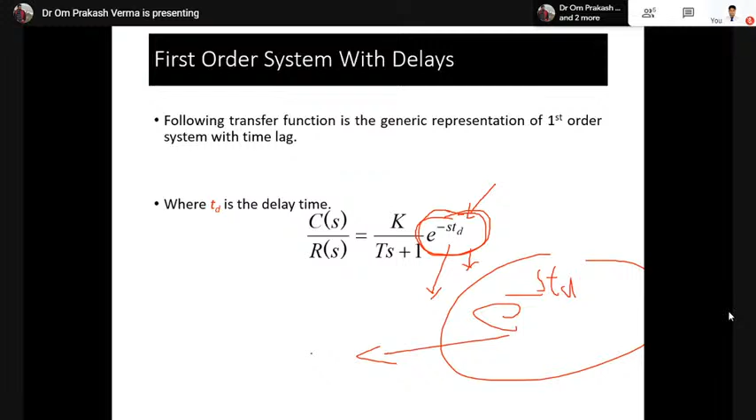So suppose the delay system is a first order delay system like this one. The response of the delay system is such type of response. So now what is the meaning of lag? What is the meaning of delay system? It means, you see here.

Let's say I'm illustrating this with one example. Let's say this is a tube, a one tube. We are supplying some feed here and taking the output from this side, as Q. So this Q is entering here at, let's say, t equal to 0.

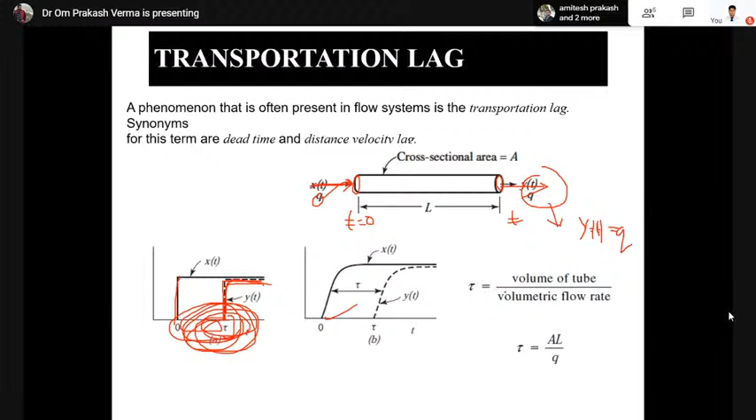But at the same time you are not able to get the same value at yt. So yt will take some time to give the value q. It means at t equal to 0 you have applied some input, but at t equal to tau, let's say, it will give the response. The response will be obtained at this time. So what is this time? This time is nothing but the delay time. What is the delay time? It means, suppose volumetric flow rate is nothing but meter cube per second.

What is the volume? Volume is nothing but meter cube. So the volume of the tube when divided by the volumetric flow rate, meter cube will cancel and second will come.

And this is the delay system. So tau is nothing but A into L, that is the volume, divided by the volumetric flow rate. So for any pipe system, it is nothing but AL upon Q.

Now, what is the transfer function of such a system? So Yt is equals to what? Yt will come as xt minus tau. Why? Because this Yt, how is it written? Yt is equals to x of t minus tau.

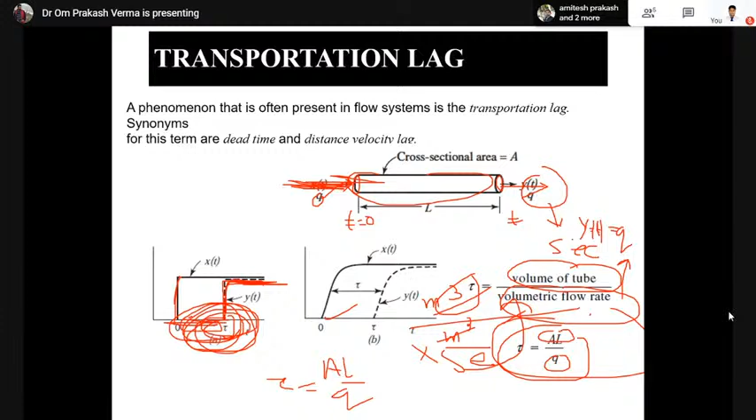You can write this with the help of signals, as you already studied in signals and systems. What is the Laplace of this one? The Laplace of this is e to the power minus s tau into xs. So Ys becomes e to the power minus tau s into xs.

Now this is the output and this is the input. We are taking the relationship between output upon input, and it comes to e to the power minus s tau. That is demonstrated here, e to the power minus s tau.

Now come to some approximated value. Sometimes it is not generally written as e to the power minus s tau. E to the power minus tau s is sometimes written like 1 upon e to the power tau s, and e to the power x is generally written as 1 plus x plus x square upon factorial 2 and so on. So this is the equation.

Now if we retain this equation approximated up to the first value, because if tau is very small it can be neglected, then e to the power minus tau s becomes 1 upon 1 plus tau s. This is one method of writing it, approximating e to the power minus tau s as 1 upon 1 plus tau s.

The other method is writing e to the power minus tau s with half the portion written as e to the power minus tau s by 2, and the other half as e to the power tau s by 2. Expanding this up to the first term gives the approximation known as first order Pade. However, if you take the second order term, it is known as second order Pade. It is very important for process control engineers to consider the delayed response, and this is a second order system.

Hello. Hello? Yes sir, the query for today has been shared on your email. So can we stop here? Yes sir, the query for today has been shared on your email. Okay, second order system we will start from tomorrow, and then we will try PID controller.

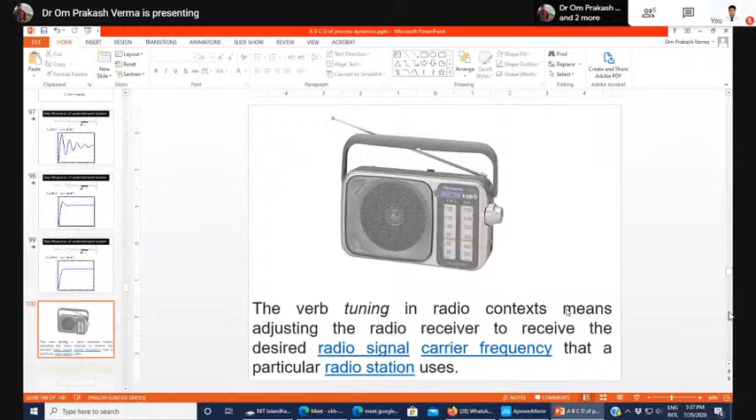Amitesh, if you allow to take one more day, then we can continue. We can. Okay. So just talk with your principal and higher authority so that I will ensure the permission is granted tomorrow, because the topic is more clear to students, otherwise some things will be missed. Okay, sir. So I'm just checking the response.

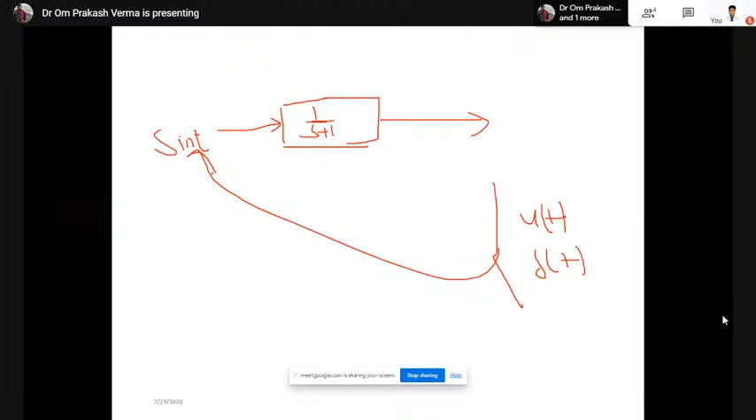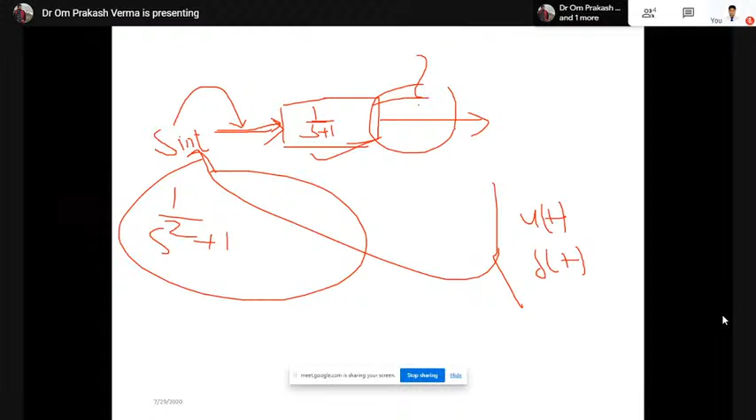So one method is to convert sine t to 1 upon s square plus 1, that is the Laplace, then multiply and take the inverse Laplace. This question was asked in the GATE exam in 2009 or 10, or 12 or 14, I don't know the exact year. But this problem has been asked already. So 1 upon s square plus 1 is not a very good approach to solve such type of problems.

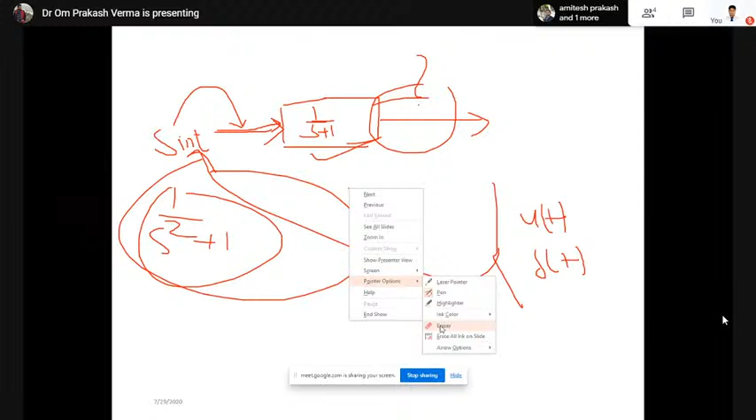There is a method to solve using frequency domain analysis. Using frequency domain analysis, you can find the response of the system very fast. The magnitude is one, and omega, the frequency, is one. As you know, when the input is sinusoidal, the response is always sinusoidal. Only the magnitude will change or the phase shift will change, or some damping will come in the picture, or the equation becomes like this one.

So if you see in this case, let's say sine t is applied here as an input. The magnitude is one, the frequency is one, so the output is again sinusoidal, with change only in the magnitude and phase. For the magnitude you can write s equals j omega, 1 upon root of omega square plus 1. And the phase angle you can calculate as minus tan inverse omega.

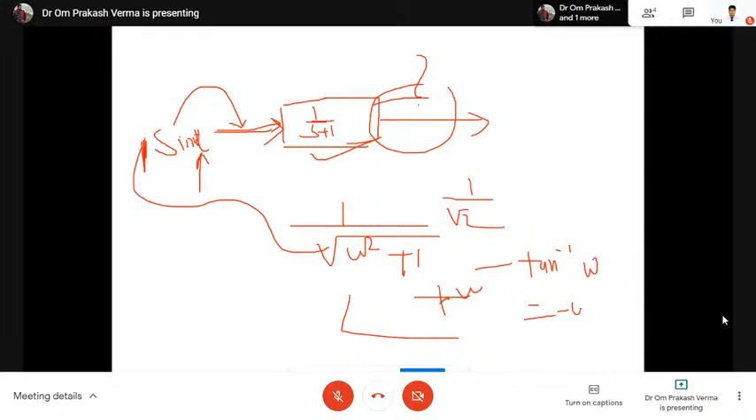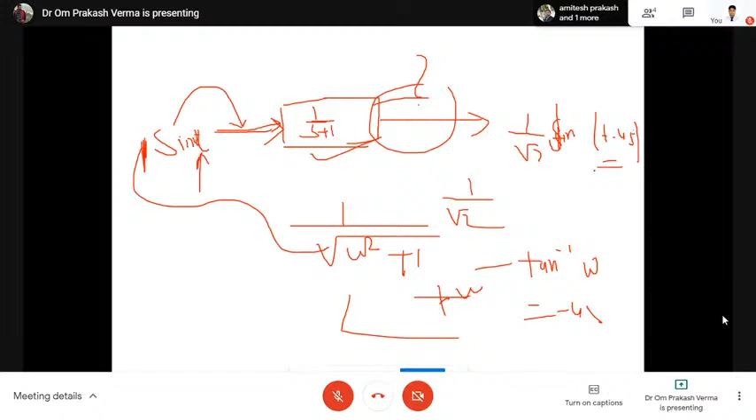This we'll discuss tomorrow. So the magnitude, when you put that, 1 by root 2 will come, and the phase is minus 45 degree. So the final response is 1 by root 2 sine of t minus 45 degree. This is the answer of this problem. So you can calculate such problems like this.

Second query is to explain the standard test signals. Just try to read. If the topic is not clear, then you can ping me or call me, no problem. This topic must be covered by your faculty. Signal system faculty and control system faculty both teach the same topics in the introduction.

Please suggest a few books of control system. There are so many control system books available. If you want to study control system only, the best books are I.J. Nagrath and M. Gopal, and B.C. Kuo. One of the Indian book authors is also available, B.P. Rathi. However, for process dynamics, I would suggest three books. First is Coughanowr, process dynamics, and second is Seborg, process dynamics and control.

And for the development of models using data, one book is available in the market from IIT Madras faculty, System Identification, written by Professor Arun Tangirala, IIT Madras. These are some books available in the market. If you don't have the book, I can provide the soft copy to your faculty, Amitesh.